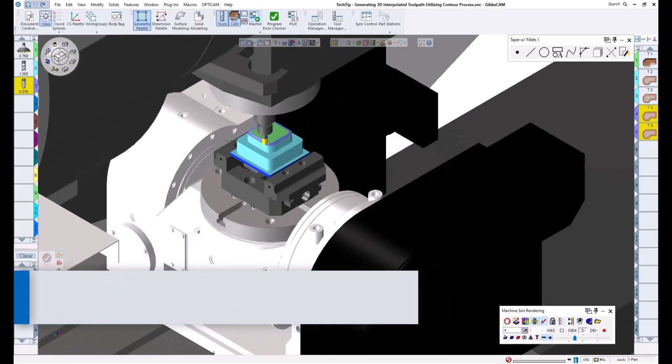In this video, I will be going over how we can generate some basic 3D toolpath while utilizing only a contour process and wireframe geometry. This is extremely useful when needing to add a top or bottom radius to an edge, and it is also beneficial when working with tapered walls and large or deep chamfers.

Of course, there are certain tools available for these types of features, but in a shop setting, these tools may not always be readily available. Utilizing the wall choices aspect of a contour process can get the job done with more common tools we may already have on hand. With that being said, let's get started.

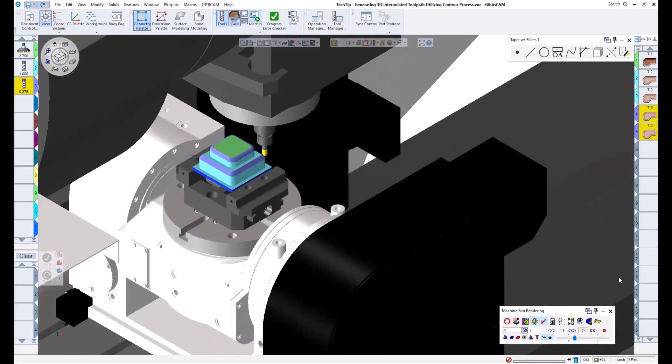When I turn off my rendering, you can see I have a solid model here. This is only for reference and for geometry extraction. A solid is not needed to generate this toolpath. We will be working with geometry only. If you don't have a solid to extract any geometry from, you'll need to draw it out yourself and ensure that it is located properly. Once that is done, we can begin building our process.

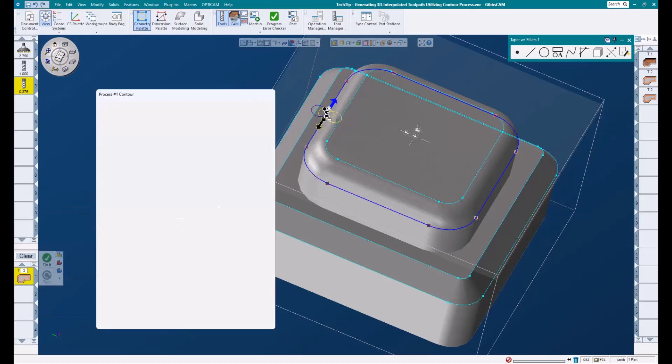For this example, I'm going to add this 1/4 inch radius to the top of our part using a ball end mill. When working with the top radius, we need to use the outermost shape of our feature, which would be this bottom edge here. I'll take my 3/8 ball end mill, and I'll load a contour process. I'll update my process parameters and enter my depth values.

The way I get my finished Z depth is by subtracting the radius from my surface, and in this case that would be 1/4 inch. Next, I will subtract the radius of my cutting tool from that value, which is 3/16. This will allow the edge of that ball nose end mill to come down and completely clear the radius as it follows this feature and gets to this depth.

And then after that, I'll take it just a little extra to ensure that our tool does travel past the bottom of this feature and doesn't leave a lip around this island. Once I have my depth dialed in, I'm going to click on this button here. This will open up our wall choices dialog. You can see here we have a couple of strategies. I'm going to go ahead and choose taper with fillets.

This allows us to mill a top or bottom radius, an angled wall, or a combination of any of these three features. For now, we're just looking at top fillet, so I'm going to zero these other ones out. I want to add a 1/4 inch to my top fillet. Below that, there are even more options to help control this toolpath. We can choose to cut from the top down or the bottom up, and we can select between use D-step and shape step.

A good rule of thumb is to use D-step when roughing and shape step when finishing. I will show an example of this in just a moment. But for now, let's choose D-step and enter a value of 0.025. This number can be more or less. It all depends on what type of surface finish you are looking for. A larger step is not going to output as much code, but of course the surface finish won't be as nice as a tighter step over amount.

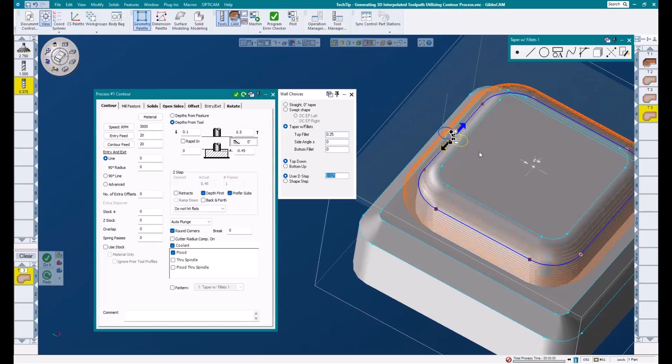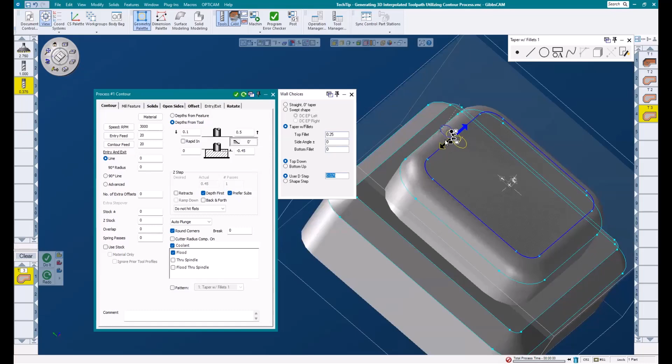And you can see we get some pretty nice toolpath. It makes one pass, steps down and out, makes another pass, and continues that pattern as it follows the shape of that 1/4 inch radius. Now, notice what happens if I select the wrong piece of geometry and redo this operation. It disappears, or rather, moves in a 1/4 inch and begins to gouge our part. So that's a good example of why it's always important to make sure we're using the correct piece of geometry.

Now, to speak more on the difference between use D-step and shape step, I'm going to look at the front of my part and zoom in on this radius and toolpath. And I'm going to click the shape step button in my wall choices dialog. Once I select shape step, another box opens up for ridge height. This allows us to enter a desired ridge height we are trying to achieve.

I'll hit the redo, and you'll see our toolpath change. If I use my hotkeys to flash back and forth between undo and redo, you can see the difference. It now has more passes. This is because D-step is considered a constant step, whereas shape step allows Gibbs to vary the step amount throughout the feature in order to achieve our desired ridge height.

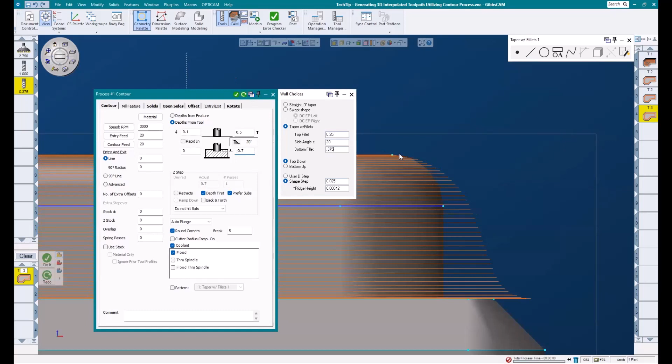To show a little more capability with this feature, I'm going to take my final Z depth to the floor of this part, which I know is negative 0.7. Then I'm going to add a 20-degree side angle and a 3/8 bottom fillet and hit redo. You can see that this toolpath is blended smoothly between these three features.

But I'll go ahead and put this back to where I was for that radius, hit redo, and then run the rendering. And you can see we get a nice, smooth 1/4-inch radius on the top of our part without having to perhaps dial in a roundover, which can be tricky at times.